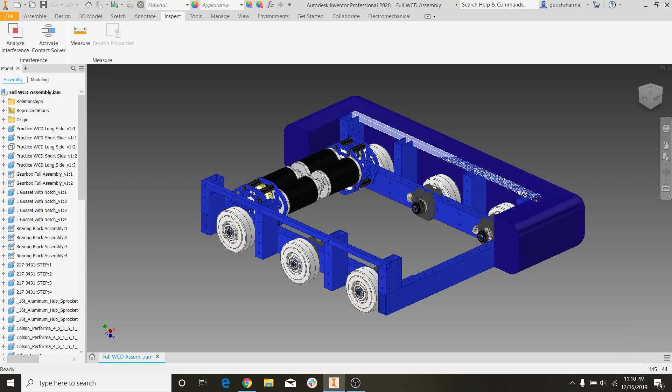Today we're going to be making the belly pan on our drivetrain. If you don't know what that is, a belly pan is basically the big plate that goes on the underside of the drivetrain. It connects all the pieces of VersaFrame, like one giant gusset. The more important use is that you can use it to mount electronics to your base, and it usually has a crisscross pattern which makes it really easy to zip tie wires down.

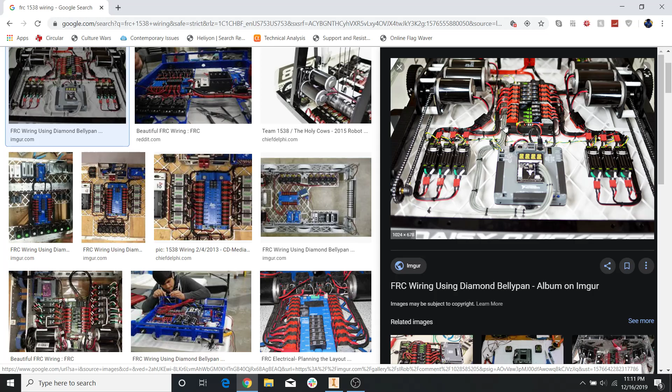Let's take a quick example of that. This is their 2015 robot, a great example of how to make a really effective belly pan, or make use of a belly pan. You can clearly see all these wires are zip tied down to the crosses on the belly pan, making for really clean wiring in general.

Let's go look at another team, of course 254, great team. Just another example of how you can use a belly pan. Over here we have a more simplistic belly pan, no crosses - I don't know what the technical term is, fence pattern maybe, whatever you want to call it. There's no pocketing on this belly pan, but the wiring is still pretty clean - I think they did that by drilling holes into the belly pan and running the zip ties through there.

So that's the general purpose behind the belly pan. Other teams do electronics on the side, which is something we did last year - it made it really easy to access, but we're going to focus on the belly pan that goes on the drivetrain. Teams sometimes like to do this really compact electronics thing. I don't know how I feel about this, because it seems really hard to access the motor controllers when you're trying to test the motors on your robot. That's just a personal preference.

But let's go ahead and go back to this CAD. To start off, I'm going to hide this bumper that we did from the last episode. Okay, and now let's start a new part.

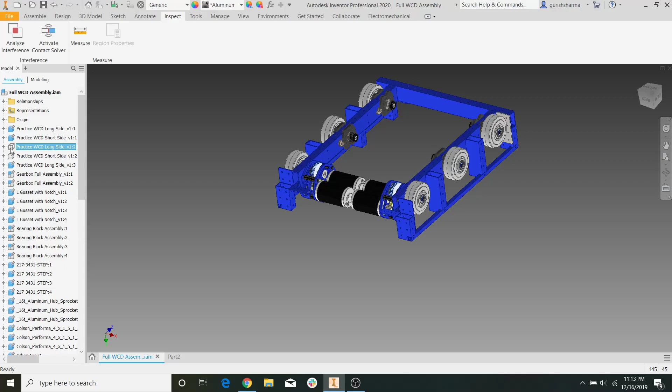The first thing we want to do is take a look at the dimensions of the bottom. Oh, looks like I hid this bottom piece - is it this one? Let me just undo real quick. Let's hide this one. Okay, let's create a new part.

Let's start a 2D sketch on the XY plane. We're going to start off by measuring the distance between faces to see how big our belly pan needs to be. I think it's going to be 24 by 16, most likely 24 by 16. Alright, that looks good, so let's start with a rectangle that's 24 by 16 - let's go 16 and then 24.

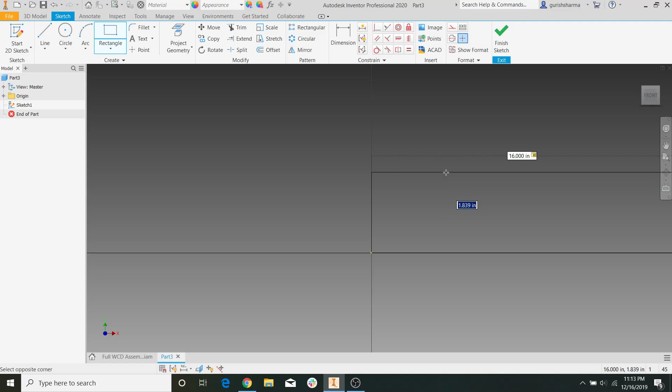In order to mount it to the frame of our drivetrain, we're going to make use of the holes that run around a VersaFrame like this. So let's start by offsetting by 1 inch, because that's how thick our VersaFrame is, and we can go ahead and pattern the holes around here. VersaFrame comes with 0.163 holes, but on our team we drill them out to 3/16, so that's what I'm going to do. 3/16 is not clearance, it's just the same diameter as a 10-32 bolt.

So let's offset this exactly how the VersaFrame is offset. If you don't know where I'm getting these numbers from, you can either measure it from here, or you can just go on VexPro's website and see the dimensions of VersaFrame. Anyways, we're just going to quickly pattern these across the drivetrain.

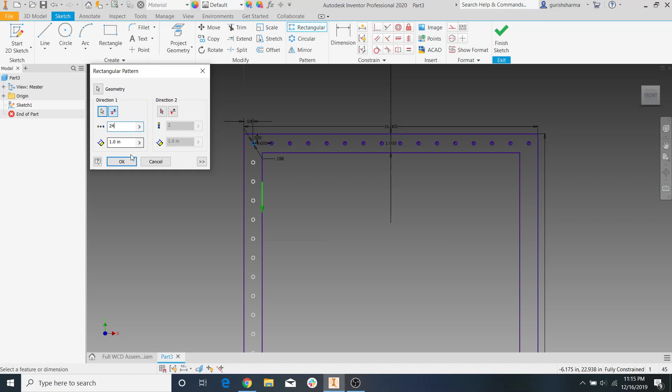So 16, and now let's do direction - flip the direction, make that 24. Okay, now just to do a quick recap, I'm going to use the mirror tool.

To use the mirror tool, you're going to start by making a line segment that's going to act as the line you reflect everything over. Make sure it's in construction, because this is not part of your final product.

Alright, let's mirror these holes. Oh yeah, it works - oh, I accidentally selected the line itself to be mirrored. If you make that mistake, just hold shift and then click the line again, I think. Alright, now mirror line will be the center one, if it wants to let me select it. Oh okay, looks like I already did select it.

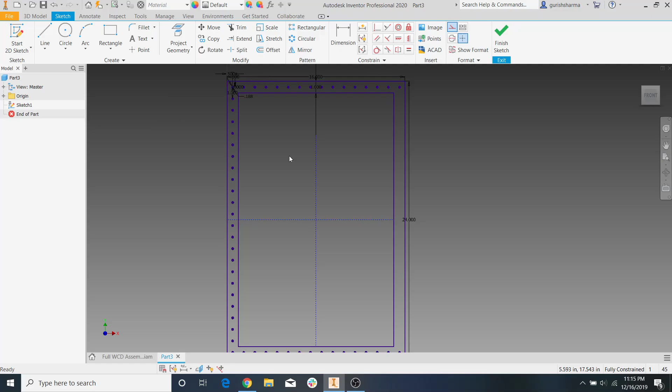Anyways, let's do the same thing on the other side. Let's start here, highlight all of this, mirror line, click this, apply, done.

Okay, now let's extrude this. Why the heck is that a hexagon? Why are these all hexagons? What did I do wrong here?

Okay, I guess it just looked like they were hexagons. I don't know what really happened right there. But okay, I guess they're still circles.

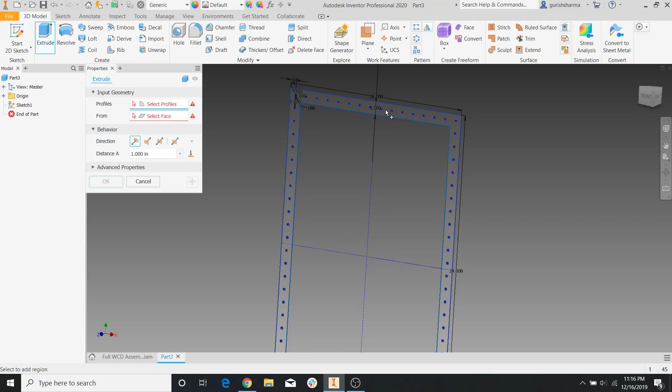So let's extrude this. Some teams used to use 16th-inch metal, some teams use 1/8 inch. I think the general rule is that if you do 16th-inch metal, you're going to have really thick cross braces, and I don't want to do that. So I'm just going to do 1/8 inch thick metal, which will also be good in terms of holding together the frame. I think 1/8 inch was a pretty good thickness to make sure everything stays together.

Now the next thing we want to do is create the actual cross braces, right? So let's start another 2D sketch. And the first thing we're going to do is project geometry.

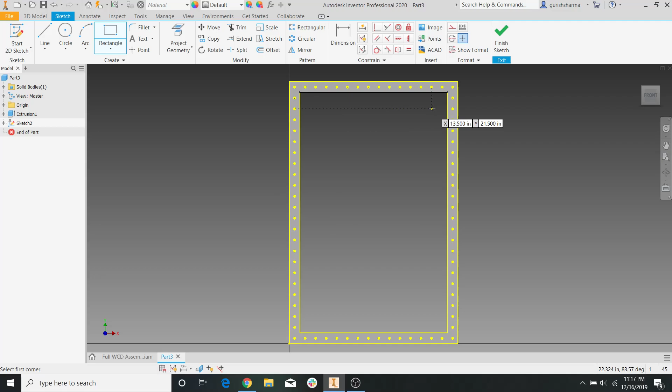Okay, so we basically need to decide how many cross braces do we want to go across and how many cross braces do we want to go down. I honestly am just going to do, let's see, we can probably do like 8 across this way and 10 down. I think that sounds good.

So I do want to know the dimensions of the inside. It's just 22 and 14. But just to show you guys what that looks like, I'll set them up here.

Now we're going to start by making a template of one cross brace in the corner. And that's going to start by making a construction box. We basically are going to take the length of the inside and then divide it by the number of cross braces we want. So let's do 14 divided by 8 because we want 8 cross braces along the inside.

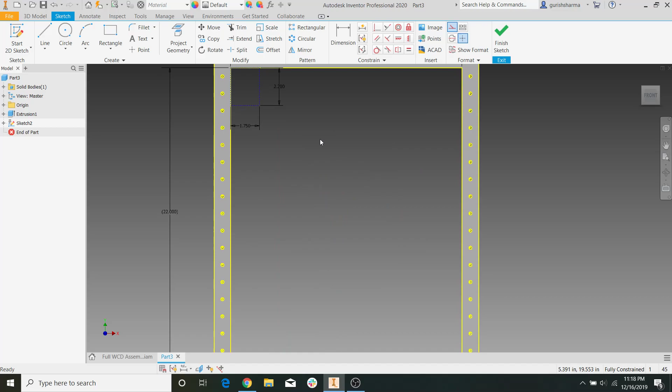And then for the other one, we'll just do 22 divided by 10. Okay, I actually think we can go... no, those look like pretty nice numbers. I was going to go a bit bigger, but you guys can mess with it however you want. I think I like this.

So the next thing we're going to do is create the actual crosses, and that's by staying in construction. We're going to go from corner to corner, right, really simple. And the last step is really just doing the same thing we did in the other episode with pocketing and doing this 3-point center style design.

And then let's do 0.2. Oops, it looks like I'm still in construction, so I'll just undo that, get rid of construction, and do that one more time. Okay, and let's do it in the other one.

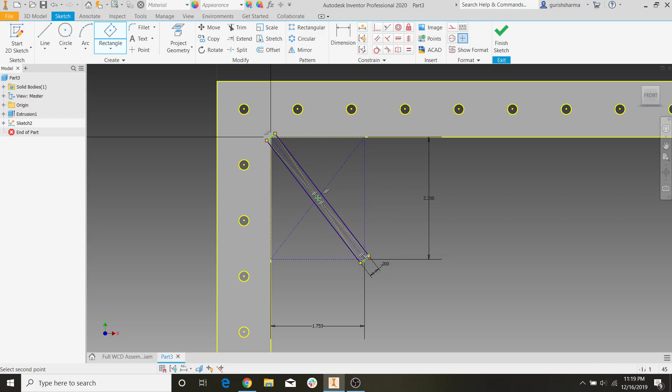So I don't have to pattern this inside here. I'm going to finish the sketch and then pattern it externally, just because it makes more sense. If you pattern this in here and then try to extrude it, you're going to have to click each individual cross brace. But if you extrude one and then pattern the extrusion, it saves a lot of time. So let's do this one.

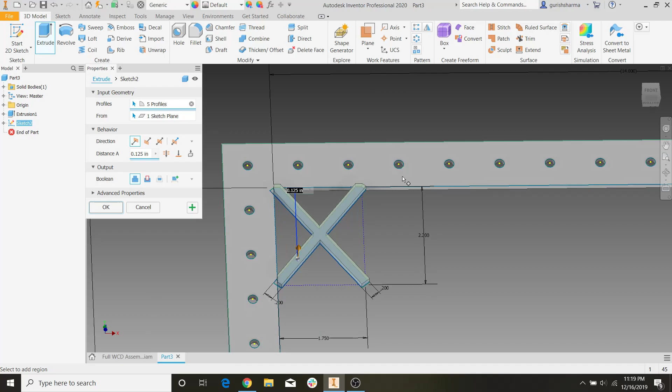Okay, now you can see it's going above the belly pan that we've already made, right? I want to teach you guys another tool here. So what we're going to do is tell Inventor that instead of going 1/8 of an inch, we're going to go to a certain distance. If you hover over this, it says To, right? We're going to say we want to go to the bottom face of the belly pan.

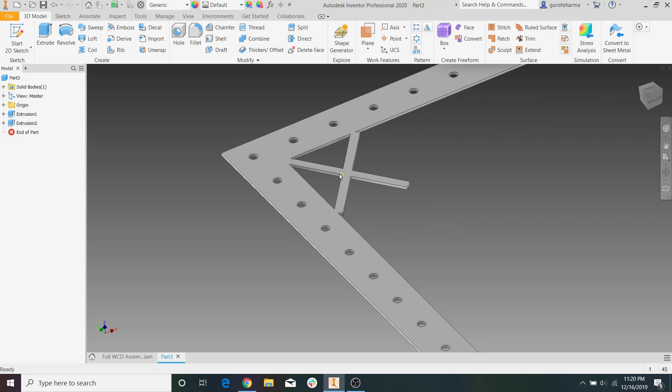And now let me show you why this is important. Let's say okay, so that means if we edit this extrusion here and say I just want to change it to 1/16 of an inch, that second extrusion will automatically update, right? And that just makes stuff really easy. Okay, now as you can see, there's a gap here.

In this corner here, and this corner here. But I'm pretty sure it should be filled after we pattern it. I think it should work out. If not, we can just go back into Sketch and edit it. It's been a while since I've done this.

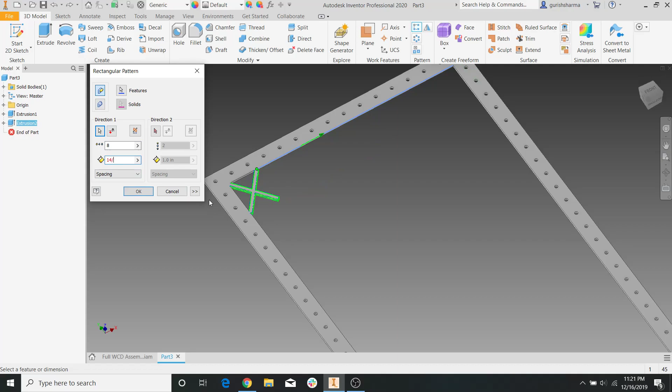So the feature we want to rectangular pattern is going to be the X, of course. The direction we're going to choose is across. Now the first thing it's asking is the number of times we want to do it. Earlier we said we want to do 8. And the second one is asking the distance, which is going to be 14 divided by 8. Right? And you can see it just fits perfect.

And direction 2 is going to be this edge, going not that way. So let's flip that. We want 10. And then I believe it was 22 divided by 10. Okay. Now you can see that all of the crosses overlap, and it should make for a clean belly pan.

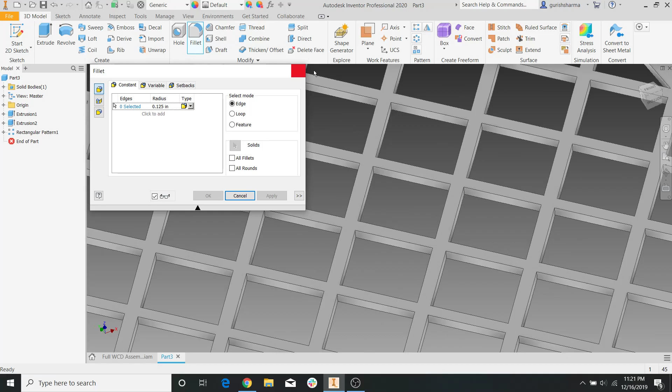Okay, now let's do the little more time consuming, or CPU or GPU, I don't know how computers work, whatever, computer intensive process. We're going to be filleting every single inside curve, because as you might remember from the pocketing video, a CNC router cannot cut perfect edges. Maybe if you have a water jet, but a CNC router definitely cannot.

So just to illustrate that real quick, let's do a sketch on here. The bit we use on our CNC is a 3/16 bit. So if I have a 3/16 bit that's this big, you can clearly see how it won't be able to get into this corner, right? The most it can do is its radius, so from here to here, which would be 3/32. So that's the size fillet we can create.

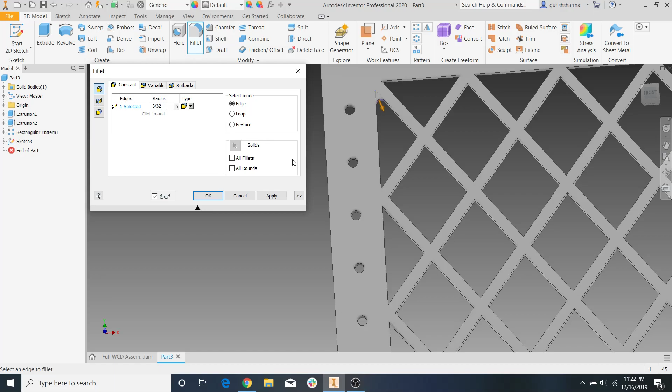So all I'm going to do is hit this inside edge, right? That's 1/8 inch. But I want to do the absolute minimum, which is going to be 3/32. So not much difference, but it's still better than 1/8. Now, this is where it gets kind of crazy. We're just going to hit all fillets, and then hopefully Inventor doesn't die and it actually executes all the fillets. So we'll see what happens.

Alright. Oh wow, look at that. It looks like it did all of them pretty fast. Much faster than I expected, to be honest. And then let's hit apply. Okay, I think applying is the part that takes a bit longer. And of course you might notice that I missed the fillets in the corners. I'm going to get to those in a second.

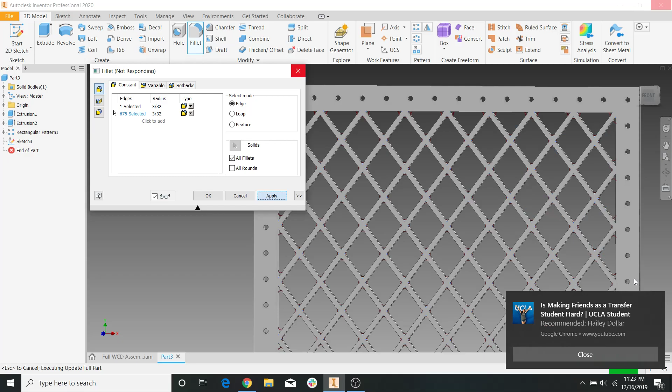So while this loads, let's talk about the next step. Next step I want to do is not only mount this belly pan to the drivetrain, we need to start cutting holes for things that already mount to the drivetrain, such as the bearing blocks and the gearboxes. So the gearboxes, once I switch over to the other tab, you will be able to clearly see that they stick through the belly pan, as well as the West Coast Drive bearing blocks. Alright.

It looks like all those fillets worked out. And now I want to go ahead and hit the fillets in the corner. I actually think I might make these an 1/8 inch fillet just so it looks nice. Yeah, let's go ahead and make this 1/8.

Okay. And now, before we move on, I'm going to quickly save this just to make sure we don't lose anything. Let's just save that. Actually, you know what? I'll just save this belly pan. V1. Alright.

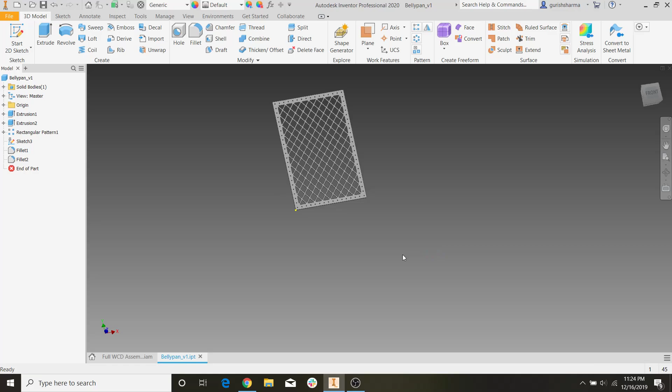And now we're going to import this into the assembly, and you'll be able to clearly see how a lot of it just won't work in its current state, and that's going to be the next step, editing it to make everything fit. Go ahead, right click, rotate, escape, let's start constraining. The first thing I'm going to do is constrain to these holes. So obviously this is one of the corner holes.

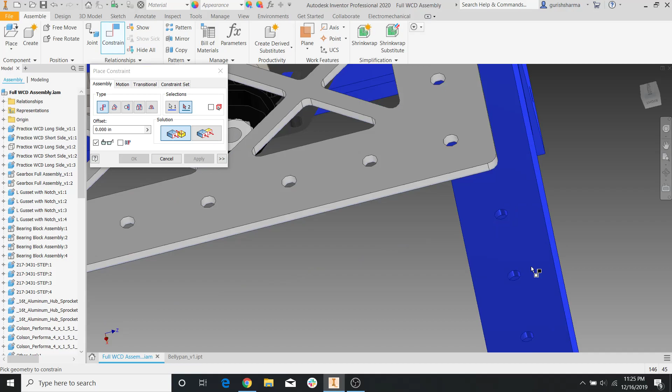And then I can pick any other set of holes. I think I'm just going to pick the next closest one, because it's very easy. And then we can just do a face-to-face constraint. I'll lift that up. A mate constraint will go from this face to this face. Okay, cool.

Now, the next thing I want to address is this problem. So, as you can see, the bearing blocks are going inside the belly pan, which is obviously a very big problem. The second problem is that the gearbox is going through the belly pan, which is obviously another big problem. So those are the next two things we need to address. The first thing we're going to do is the bearing blocks.

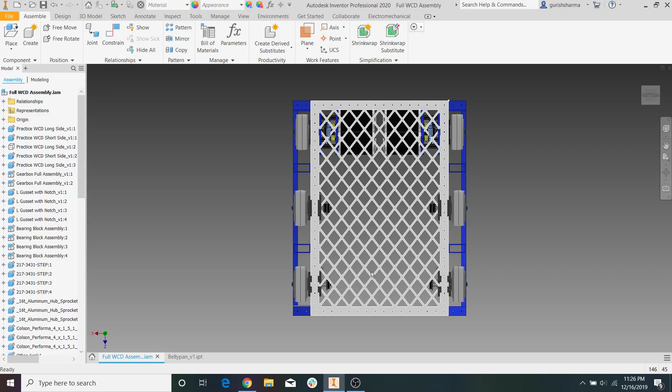Now, I'm going to be completely honest. The method I use to cut all the holes that go into the belly pan is pretty much guess and check, because I don't know. I mean, I could measure how far away this is from here, but to be completely honest, I found it to be a lot faster to just guess.

So let's just get a rough estimate, I guess. 3.5 inches. Okay, so I need to know that the rectangle that I cut out, the center of it needs to be 3.5 inches from the bottom edge. So I guess that kind of helps. So let's start a sketch.

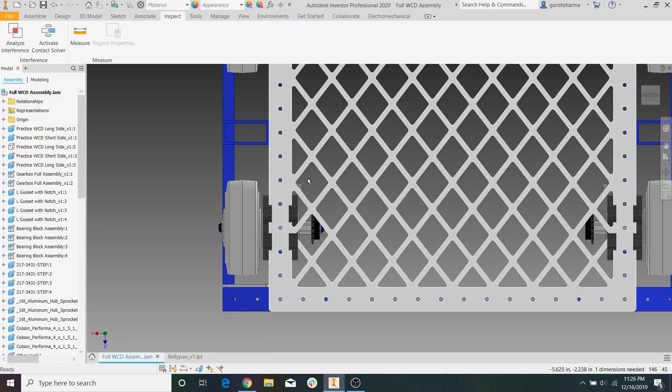The first thing I'm going to do is cut out my shape, and it's going to go 3.5 inches. Oh, that's not what I want. So the width is just going to be 1 inch for now, and then I can make the height of it like 2 inches. I don't know. Let's measure that real quick. So as you can see, it's not a very cut and dry method. I'm just kind of guessing and checking to see how this works. Okay, let's do 2.5, I guess.

2.5 inches. Let's draw a center line from here to here. Construction, because we don't really care about it. And then we can center it 3.5 inches away from here. Alright, so I'm just going to do one for now just to test it and see what it looks like. Again, let's use the Extrude tool. So Extrude, and I want it to cut to the other face, right?

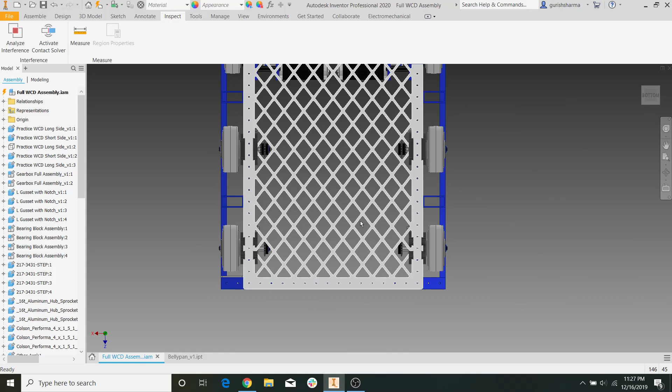Okay. Let's take a look at what happened. Let's see, what side did it cut? It looks like it cut the wrong side, actually. So let's go ahead and flip that. We're just going to open up our extrusion. Let's turn it around. All we have to do is delete this 3.5 and then make the 3.5 away from this face, right? Okay, now let's try again. Let's save that real quick and take a look at what we have.

Okay, as you can see, I clearly messed up the distance. I didn't select the center point of the line, I selected the bottom face. So yeah, that was the problem. I selected the bottom edge. So let's delete that and go from the center line, 3.5. Finish sketch.

Okay, now it looks like the only thing that's particularly an issue is going to be this cross brace area here and this cross brace area here. So all we really have to do is extend this rectangle out more, which is actually good because that will also allow us to create a more rigid frame, and I'll show you why in just a second. So instead of 1 inch, let's go 1.5 inches. Okay, nice, that extended right into the frame. Finish that. Go back here, and it looks a lot more safe, right?

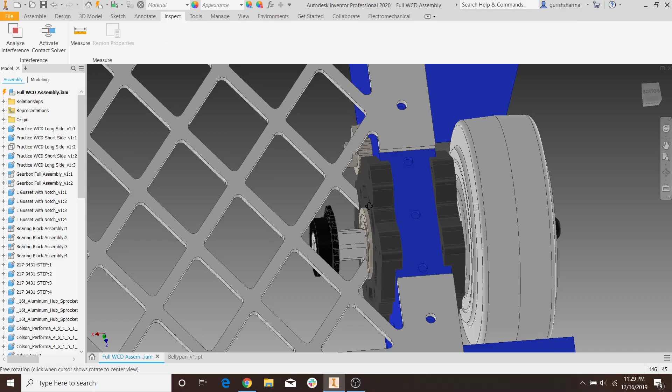I don't like that it's cutting into here like that. There's absolutely no reason to. So I'm just going to go back and edit this so it doesn't cut into that corner. Okay, so instead of saying it should be 1.5, what I can instead do is project geometry of this line, hit escape, and use the coincident constraint to say that I want this point, that white point, to be fixed to this line, and hit escape.

Sorry, throat's a bit dry.

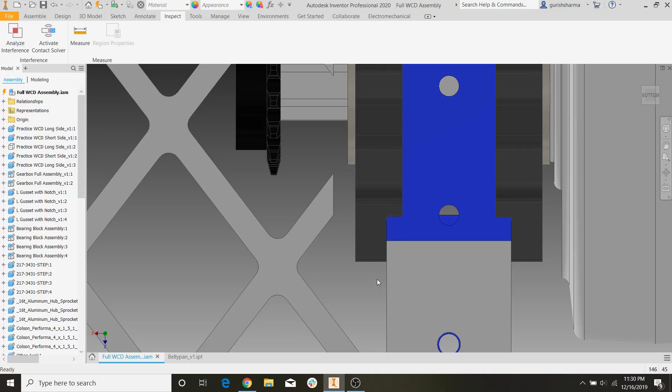Okay, that looks a lot better. I'm going to get to making the actual sturdy frame around it in just a second, but as you can see this also allows for a good amount of space. Remember, the point of a bearing block is to slide. It allows some space for it to go back and forth, right? And that's one of the main reasons we have the bearing block in the first place. And the number we selected should allow for enough movement. Okay, that looks pretty good.

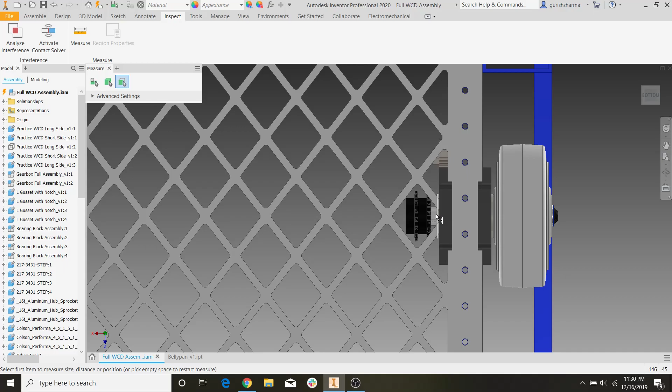The next thing I'm going to do is basically do the middle wheel, right? And then we're just going to mirror that over to the other side to these wheels. So let's do that again. Let's just measure how far away it is from the bottom face. Let's see, let's pick a rough center point. Right there. And let's do, what are we doing? The bottom edge? Yeah. Okay, so 12 inches, right? Well, it says 12.05, but it's like 12 inches. So let's do that again.

Go back to our sketch. We're just creating the same thing again, right? So let's just stick with 1 inch for now, and then we can edit it later. We're going to do, what, 2.4-ish inches? I'll keep 2.5 inches for now, and then that should be good. We're going to create a center line real quick in between, slide this over real quick, in between these two lines so we can actually dimension it away from the edge.

Hello, can you please let me select it? Would appreciate it, thanks.

Okay, this is interesting. I don't know why it's doing this. 1.209. Okay, that's wrong. That's completely wrong. Okay, I'm gonna have to do this manually. I thought I could use like the quick select tools or like the little green dot that automatically locks in stuff, but I guess it doesn't want to do that.

Let's see, 2.5. Yeah, there you go. Okay, now we can slide the whole thing. How many inches was it? 12 inches, I think. Yeah, 12 inches. Let's do 12 inches. Okay. And then to select the actual profile, we just double click on extrusion.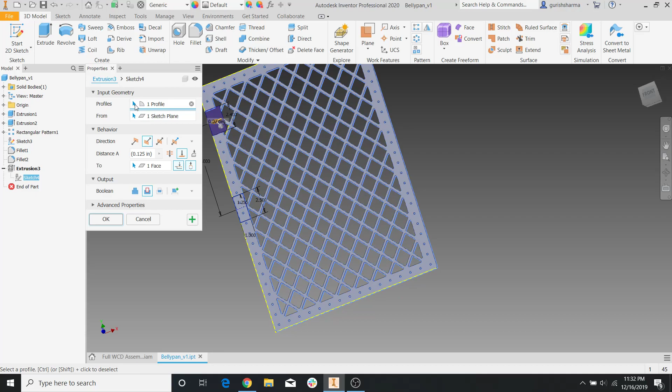Okay, and then we go back to profile. Come on. Come on. Let me select profile. Oh, sorry. I guess I already selected it. Okay, that looks pretty cool. Let's make sure it lines up, and then we can move on to like widening it. Okay, cool. It lines up. Now let's just move it out similar to what we did in the other one.

So I'm going to delete this width that we have here, and then project geometry of this inside curve, and then I'm just going to make that coincident constraint. Oh, not that.

Sorry, I keep having to drink water.

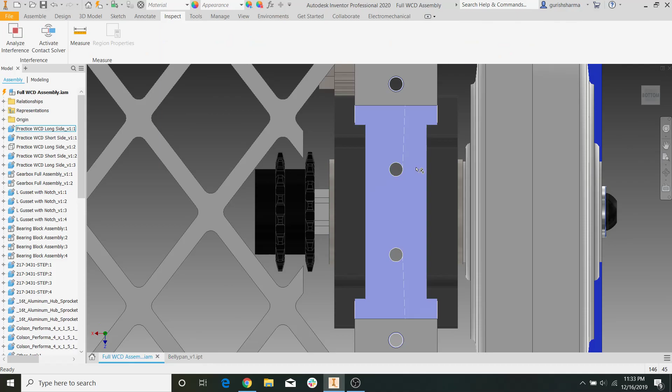But yeah, that should be good enough. And then if this looks good, which it does, what we're gonna do is extend or like mirror this to the other side, right? And once it's mirrored to the other side, we can go ahead and create a frame around this so it doesn't look like it's just cut off randomly.

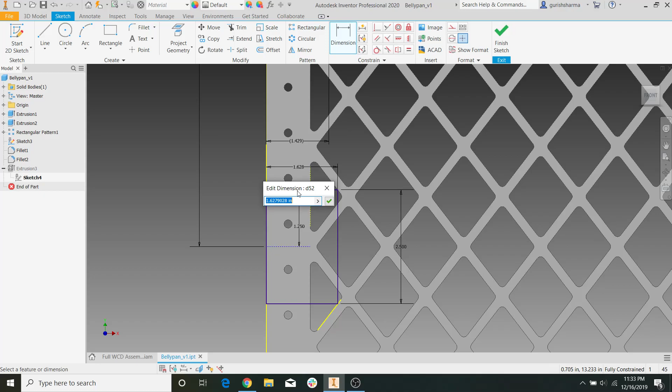One thing I find actually kind of interesting is that it looks like this is, yeah, it's definitely longer, which is interesting. So this one is about 1.429 inches. And you know what, instead of doing coincident constraint, we're actually going to delete that and then just make it the same dimension, because we don't need to make it coincident constraint. Yeah, this will work just fine. And it'll be a lot more symmetrical, right? Yeah, that looks a lot better.

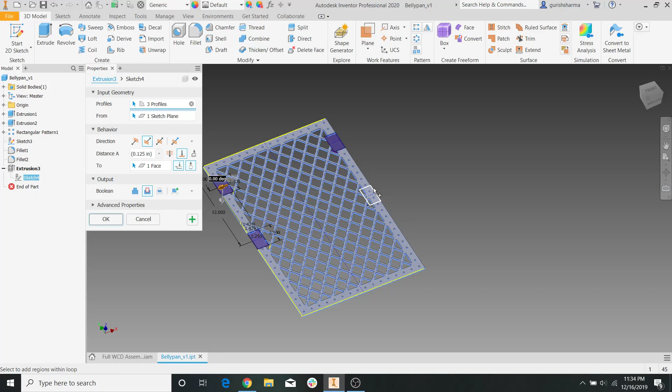So now let's go back to our sketch and then just mirror this whole thing to the other side. And you guys obviously know how to do that, so I'm just going to go through that real quick. Hit escape, mirror. Let's go ahead and mirror all of this. And then we just have to actually select those profiles. So profiles, select, hit OK, and then let's check on these. Yep, they look good. Go back to our assembly, make sure they look good. Okay, everything seems to be in order.

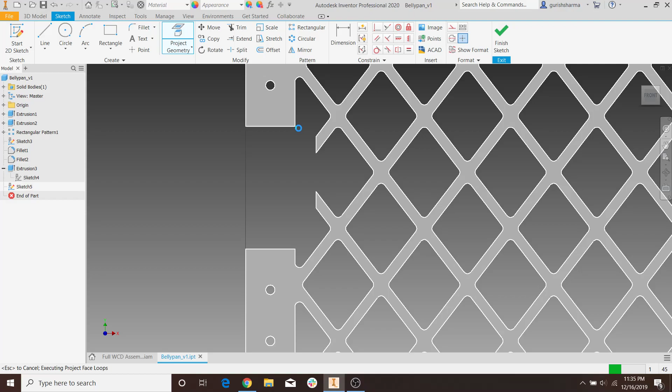Now, the slightly harder part is going to be actually creating the frame that goes around this. I'm going to show you how to do it for just one of these real quick. So all we're trying to do is create support for this whole structure here, right? So first I'm going to hit project geometry, and I'm going to project the whole thing, so I can actually edit it. Wow, that's taking a lot longer than expected. Now, I don't know how to explain this process, so I'm just going to show you. I feel like a lot of this is guess and check, but I don't know, maybe I'm just bad.

So I'm just creating rectangles to go around this, but I'm only defining the width of the rectangles. So that's a little problemo. Let's delete that coincident constraint just so I can extend this. I know that these two have to be in line with each other, right? So let's just go ahead and connect them with the construction line. And then just say that all of these lines are parallel to each other. There's probably a faster way to do this now that I think about it. Come on. Oh, my bad. I meant to say vertical line. Yeah, there we go. And now these are all moving together.

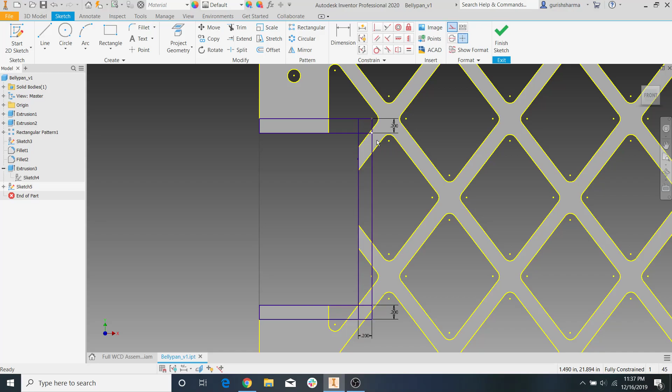Okay, now all we have to do is add a final rectangular piece that is also going to be 0.2 inches wide. Yep. And then let's take the construction out on that. Come on. Alright. And now what we're going to do is set it up so this line is going to be on the border of this. Okay, so if you can sort of imagine this, if I extrude this, I've now created a more rigid frame to go around this whole thing.

And the reason this process is kind of random is that you're going to get a lot of corners like here, or small gaps like this that you just have to remove manually. You can't fillet them out or something. You just have to manually cut them out. So what I'm going to do is connect this with the line here from here to here.

Oh, I'm still in construction, so let's get rid of that. Connect these two with the line. And now I should be able to just trim these off. Or not. Okay, what I'm going to do is delete the dimensions. And now I should be able to trim these off. Okay, that looks pretty good.

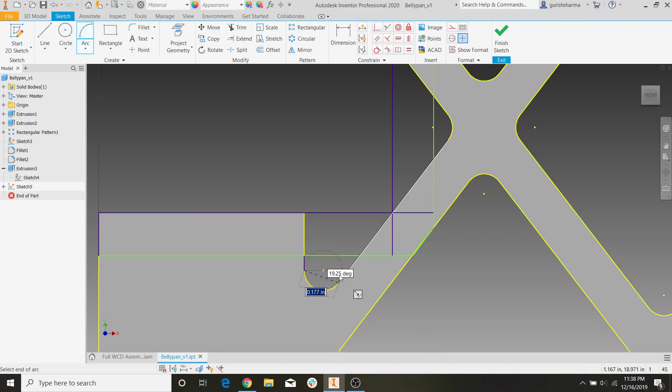So stuff like this, all you really have to do is go over the parts you want to keep. So I'm just going to go over this whole segment here. Let's do an arc real quick. Where does it go to? Oh my god, Inventor is being very laggy. Okay, now let's do a line from here to here.

And so the reason I'm doing this is because I don't want this to be a hole. I want this whole region to be filled in. And then we can take care of the rest of it just by making this construction. So since this line is construction, it obviously won't be able to extrude the rest of it, if that makes any sense. And so let's just repeat the process for the other holes.

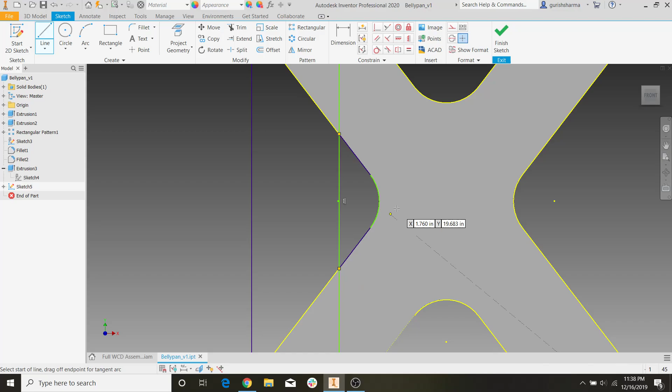And then I'm just going to do this for one of the bearing block pieces because I feel like this is pretty self-explanatory, and I'm just going to be wasting a lot of the video if I do this for every single piece. Okay, and then let's hit them with the line here. And then we can make this construction just so it doesn't accidentally extrude this whole diamond plate, right? It just does this area.

And then over here, to be honest, I think we can keep the sharp edge, and once this is filleted down into a curve, it should look okay. We'll just guess and see. So it's going to ask me to select some profiles. Right now it's trying to select all of these little diamonds, which is why it's taking so long. But all I really want is this rectangular frame right here, which I'm going to give it a second to load. Okay. So we can do this, obviously.

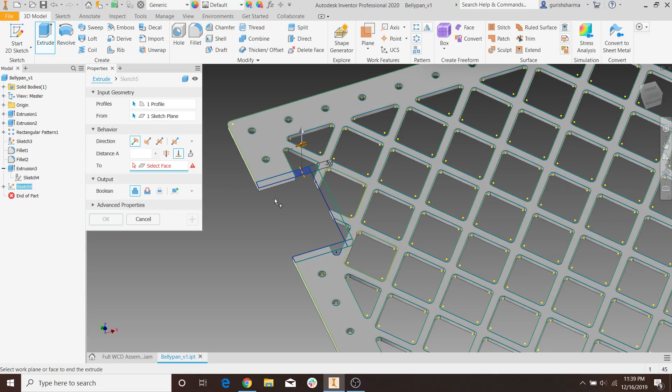Oh, before I move on, I'm going to do a quick To, so it doesn't try to extrude it in an inch. Go back to profile. Let's do this rectangle. Let's do this rectangle. This little triangle. So you can see I'm just picking all the little things that I went over earlier. See, that automatically got filled in. Since I cut this off here, it doesn't override into there. So I also want this taken out actually.

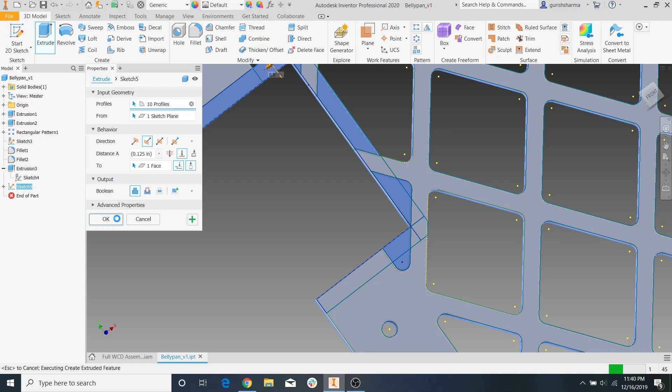And then I'm just gonna hit OK. Hopefully, crossing my fingers, this works. Let's see. So I'm gonna go back before I move on with the fillets and make sure it looks okay. Yeah, that actually looks really good. It doesn't look like the bearing block can slide too much in its current state, but we can obviously adjust that very easily, which I'm not going to waste time doing right now.

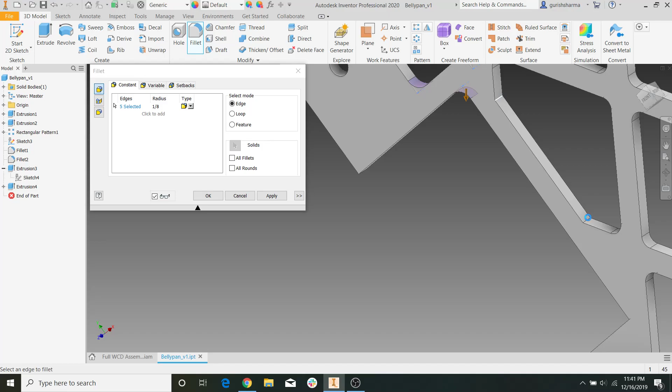But let's go ahead and hit it with some fillets. And once we give it some fillets, what we can actually do is mirror what we have done here onto the other side. I'll show you how to do that in just a second. So right now it's doing 1/8 inch fillets. I'm going to change it to 3/32. Okay, it looks like I got everything, and now I'm just going to change to 3/32, and it should be good to go.

You know what, that actually looks a lot better than I expected. So if we go back and take a look at it, damn, that looks pretty good. So let's go ahead and save this. And now, I won't repeat the process for this middle section, but I'll show you how to mirror what you've done here onto the other side.

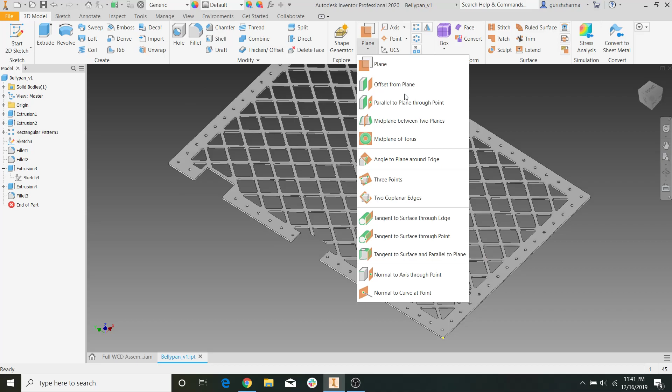So what we want to do is essentially mirror a whole 3D feature, which requires a mid-plane. So we're going to go to the drop down and create a mid-plane between two planes. And a plane includes a face, right? So we're just going to click the face here and the face on the other side.

Now it's created a plane perfectly in the middle, and that's going to allow us to mirror the features. So let's go, where's mirror? Mirror. The features we want to mirror is the last extrusion we did and the fillet, right? And then the mirror plane is just going to be this work plane. And then we go ahead and hit OK. Crossing my fingers, it all works okay. I guess it did okay.

I'm not sure why the fillets didn't go over, to be honest. Let's look at what it did. I don't know. It didn't do the fillets for some reason. I have no idea why. Say okay. If it didn't do the fillets, that's okay. We can just do it manually. I mean, it's not a big deal. I'm pretty sure it's something trivial that I missed. If you can correct me, please do.

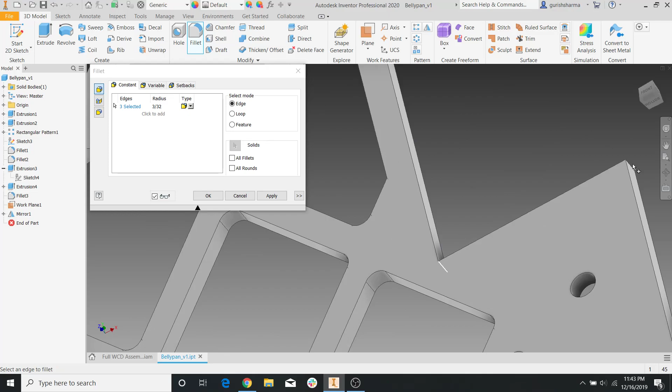That looks good. And then we're just going to get this fillet in here, and then here. I think that should be the last one. Hit apply. Alright, there we go. So now both sides look the same. Oh, looks like I missed a fillet here. If you miss a fillet, all you have to do is double click on the fillet over here, and then you can just click on the fillet that you missed. Click OK.

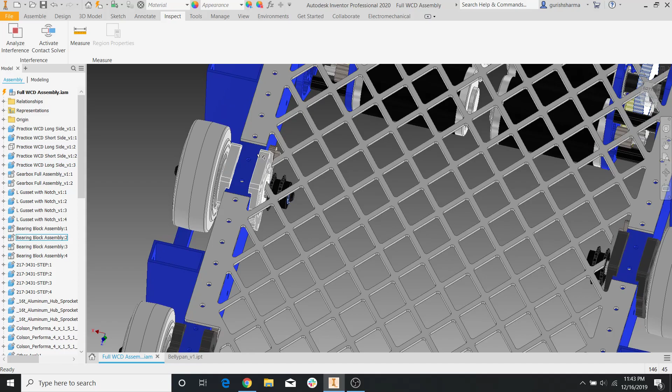Cool. So let's go ahead and save that. Go back to our assembly. Okay, that looks really, really good. You guys can take care of this middle one. It's the exact same process, right? Just slightly different shape. It's really arbitrary. You can see that I just picked whatever looked good. I took out what I didn't want, and I just threw in shapes that I thought would make it look better. It's really random, to be honest, this whole Bellypan process.

So there's two things left. We need to cut out a hole for a gearbox, and then I also want to show you guys how to actually create holes for electronics to mount to, because here, just looking at a quick example, actually that's not very helpful. Let's take a look here. Yeah, so you can see that there are actually holes in the Bellypan in order to mount the electronics, as you can see on like the PDP here, right? And so that's what I want to show you guys.

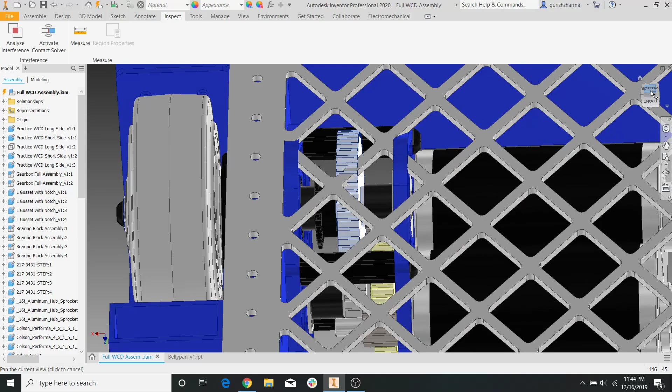So going back to Inventor, let's just create a slot for this gearbox. It's the same exact process as before, with the hole cutout and the rectangular border that we created around it. It's just for the gearbox. So since it's the gearbox, I can either create a rectangle cutout that's like here, right? Sorry if my mouse is making all the parts flash, but basically here, or what I actually like to do is start from the corner and pull out a rectangular box till the end of the gearbox, and that just makes it a lot easier to install the gearbox. It makes it a lot easier to slide in, if that makes any sense. But let's go ahead and do that.

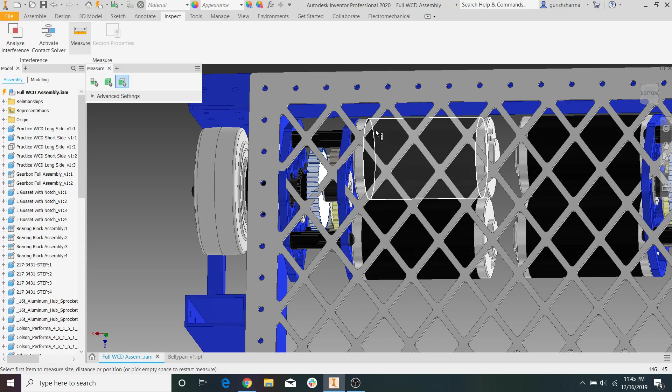We're going to start by doing a 2D sketch on the Bellypan. We don't need to project geometry of the whole thing, just the edges we need to manipulate. So let's do this edge, the top edge, and this edge, right? And so that auto aligns the rectangle up to these two edges, and now I want a rectangle in some dimension, right? So again, this is all very guess and check. The one thing we can measure, I guess, is the plate. So let's do that. I'm going to go to the inside of the VersaFrame. So 2.17 inches. I don't want to do 2.25 just because it's a bit too close and it makes it really hard to install. So let's do 2.5 inches.

Okay, as you can see, this rectangle is a free floater. It doesn't really want to lock onto anything. So before we move on, let's just use the coincident constraint and lock that center point of these lines to the whole line of the rectangle we're working on. Okay. There we go. Next thing we need to choose is the height. Again, this is very, very arbitrary. I would just like to pick a nice whole number. So let's choose the bottom edge here. And let's shoot for, I don't know, like right there-ish, I guess.

5.44, let's try, we can go under the 5 inches I guess. Just for aesthetic purposes, actually, you know what, I'm going to show you guys how to use the driven dimension tool.

So what you're going to do is create a dimension and just click check. Now hit escape to clear this. Right click and say driven dimension. Now this dimension is driven by anything you do, so if I move this around, this number will automatically update.

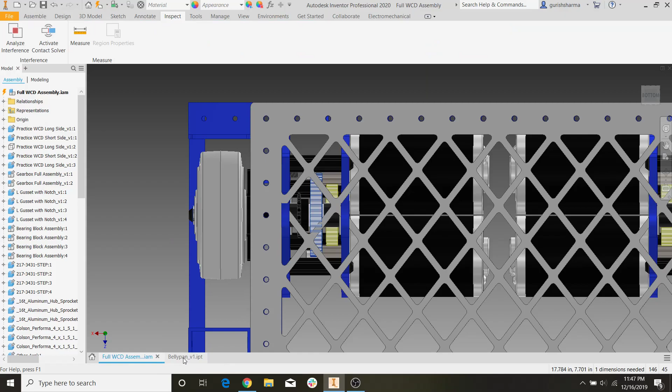So the number we had earlier, what was it, like 5.4? I know I'm in this general range, but just to make it look a lot better, what I can actually do is tell it to cut off halfway here. Yeah, I think this will actually make for a really good look.

Since there's no significant difference between here and this point here, I could make it tangent, possibly. No, I think I'll leave it the way it is. Again, this is just all random, arbitrary, it's just aesthetics. It really does not matter what you do.

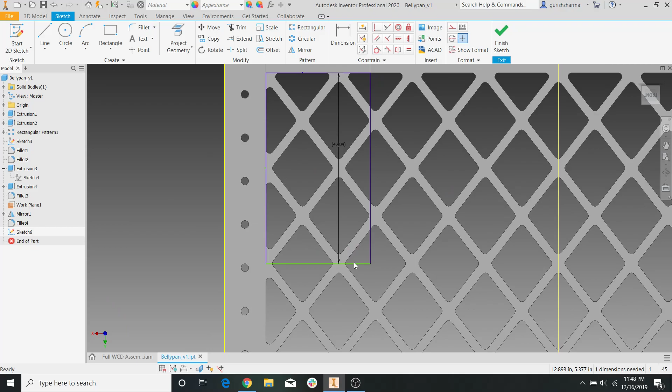So as you can see, I hit 5.5. I want to decrease it. I think that's a bit overkill. Let's do right here. What, 4 point, what is that? 4.4? I don't know, forget the number. Let's just do it exactly halfway.

We're going to do project geometry on that curve, and now hit escape and use the coincident constraint to make that point on that line. Okay, cool. Now we can extrude this, right?

Okay, and if you go back to our West Coast assembly, you can see that the gearbox clears it really well, or the cutout clears the gearbox really well. I don't know, something like that, right?

And now we're just going to repeat the process for creating the rectangular frame around here. So let's start another 2D sketch on here. Quickly project geometry of the whole thing. I mean, we could project geometry of individual parts, but honestly it's just a lot, and I might as well just project geometry of the whole thing.

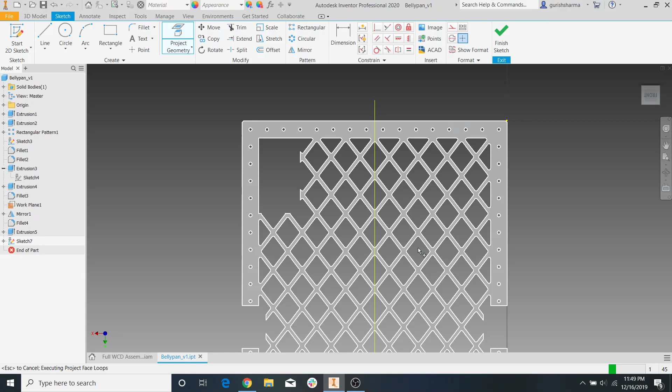Okay, so let's create a rectangle that's going to run from here down to here-ish. This line right here, right? And then I want it 0.2 inches wide. I don't know how long I want it yet, I just know I want it 0.2 inches wide.

Okay cool, now let's pull this back inside. Pull this back inside. And we can just use the coincident constraints to pull everything together. So let's do here to here, and then we can just do here and here.

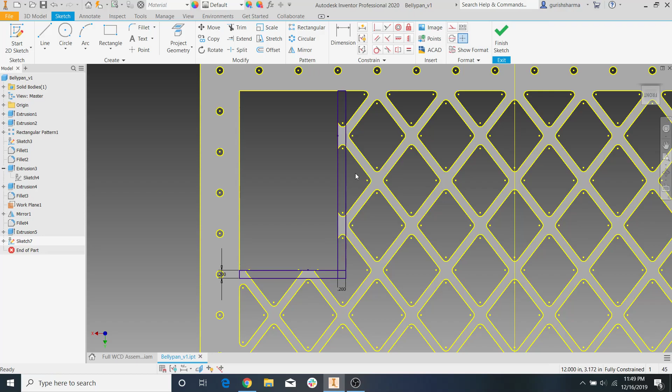And then the next thing we're going to do is go through, and remember all those little corners and stuff that were sticking out on this end? Just go through and make sure there's none of that. If there is, you can edit it real quick. And it looks like I'm actually pretty in the clear, it doesn't look like there's anything sticking out. So let's go ahead and extrude this.

Okay, give it time to load. God, I need to figure out how to make this run faster. But all I want to do is select these shapes, right? Right now it's going to an eighth of an inch, so I'm just going to change this to the To feature. I'm going to go to the bottom face of this.

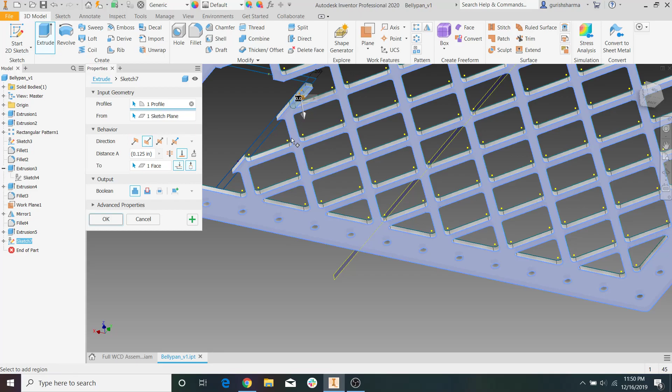Go back to profile. What am I selecting? I'm selecting this whole rectangle here, this whole rectangle here, that's it. And then hit okay. Right, and then the next thing I'm going to do is hit it with a few fillets, and we should be able to move on to the next step.

Alright, let's hit it here. I'm just going to manually go ahead and select all of these.

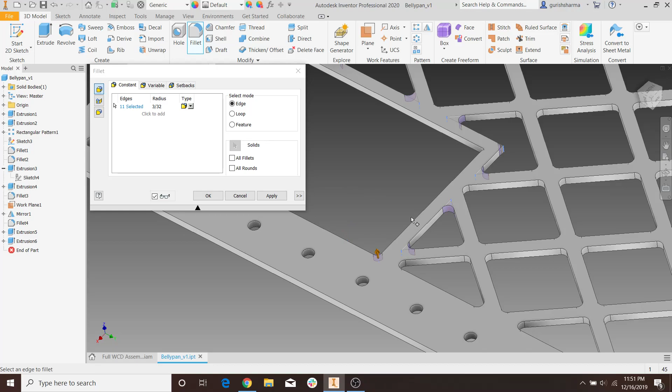If you guys have a water jet, you probably don't need to do this, but I think it just aesthetically makes it a lot more appealing. That's redundant, it makes it a lot more aesthetic, right? I don't know, that's just me though. If you got wire EDM or some cool water jet, I guess you don't have to worry about this.

Apply, there you go, save this boy. And then before I mirror it to the other side, I'm just going to go ahead and check to make sure everything looks good. Yeah, it actually looks really good. This is flush up against the bumper, sorry, not the bumper, the belly pan. And it clears everything pretty well.

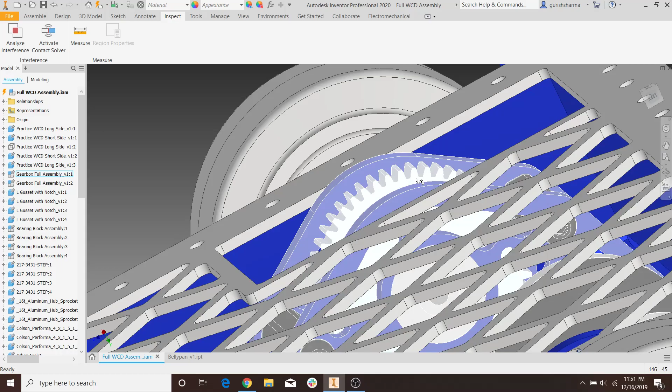You could pull in this side, you could pull in this side if you want, but does it really matter? Like, would you have mounted something in this corner? Probably not, right? So you might as well just save some weight and cut out some more metal here. Honestly, it does not make that big of a difference.

Let's mirror these features. What am I mirroring? I'm mirroring this extrusion and this fillet, and then I'm just mirroring it to the other side.

Hopefully this time the fillets actually mirror and I don't have to go through it again. If they don't mirror, I'm not going through it again - you guys can do the fillets yourselves. It's not that bad, I don't have to show you how to do it in this video. Yeah, it didn't do all the fillets. I don't know why, okay whatever. You guys know how to do that.

We're moving on. Let's save this real quick.

The next thing we're going to do is mounting electronics. I'm just going to show you one electronic piece, and from there you should be able to take care of the rest. The one I'm going to show you guys is the power distribution panel, which is this middle piece right here. So let's go ahead.

We can either go to GrabCAD, or I think AndyMark has it. But I think AndyMark sells the PDP - I think it might also be VEX. Let's try VEX, I hate AndyMark, so if VEX has it I don't have to worry about it. AndyMark makes it so hard to find CAD on their website, you have to go through their whole catalog or something. I don't even know. Oh okay, thank God, VEX has it, so we don't have to deal with AndyMark.

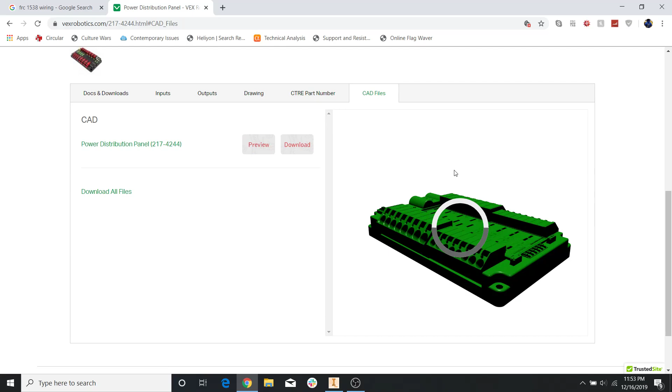Thank God. Just go ahead to the CAD file, power distribution panel, preview. Okay, that looks good.

I don't really need the CAD to actually make the holes I'm about to make to mount the power distribution panel, but I'm going to download it just for the sake of showing you guys what it looks like mounted to the robot.

So going back here, let's go ahead and start a 2D sketch on here. Generally what you do is model all of your electronics to figure out their layout. So that means I would basically take a rectangle here, right?

How big is the PDP? The PDP is 7.586 - let's do 7.6 by 4.52, let's do 4.55. So 7.6 by 4.55. Let's do 4.55, and then we can do 7.6 right here. Oh wow, it was actually pretty close.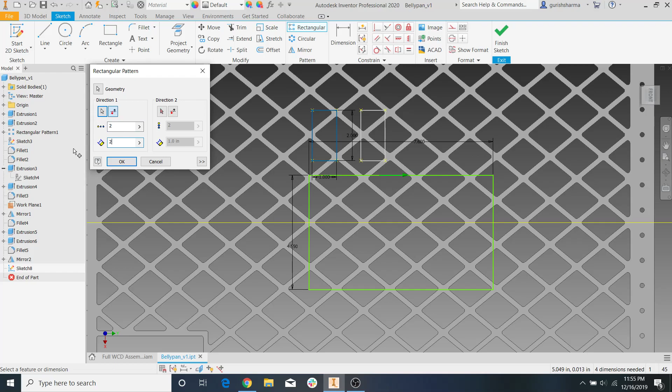Okay, so this would be representing our PDP, and then maybe we have some talons laying around here. If you guys don't know what talons are, just look them up - I'm not going to go over electronics in this video, that's for another time, I probably won't even go over it on this channel. But let's say we got some talons laying around here, I'm probably going to rectangular pattern them like this, alongside here, something like that. I think you guys get the general idea of what I'm doing - I'm just laying out all the electronics I want on my robot. But just for the purposes of this video, I'm just going to show you how to do the PDP, and from there you should be able to figure out how to do everything else.

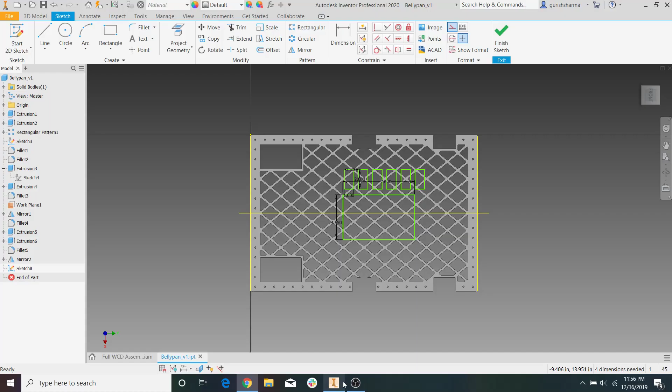So the first thing we're going to do is center the PDP along your whole belly pan, right? So let's project geometry of these two sides, and that's going to allow us to create a construction line that runs from one side to the other. And then we can just center everything on this line. Hit escape. Give Inventor a second to load, and then we're just going to align all of these little pieces.

Okay, now it just wants to slide up and down. So after laying out my supposed pieces, maybe I decide that I want my PDP to be 6.5 inches away from the edge, just some arbitrary number. It doesn't really matter. But this border isn't part of my final product, it's only representing my PDP. What's going to be in the final product are the holes that mount the PDP. So that means we can make all of this construction. We don't really care about it. What we care about are the holes.

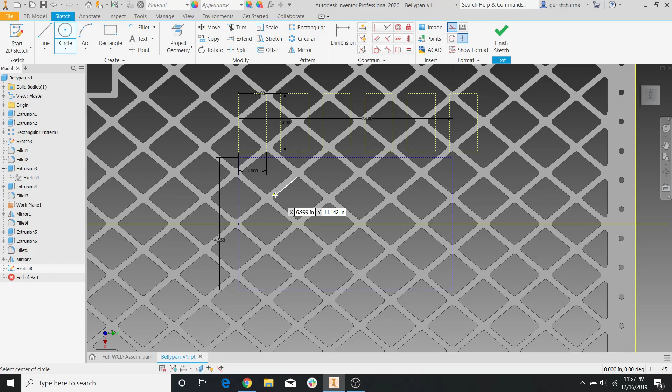So what we're going to do next is create this 4-hole pattern. We know it's a 3/16 hole, so let's start with that. And then it's in construction, let's get rid of that. Okay, let's go ahead and quickly make 4 holes. Not 2/16, 3/16. God, I'm getting rusty with my CAD skills.

But we got 4.11 for the distance between these two holes, and then 7.176. These numbers we obviously cannot round because they're the distance between the holes. So let's make this real quick. 4.11, and then let's do 4.11. And then what was it? 7.176? Okay. 7.176, yeah, like that. And then right now these holes are not completely aligned, so we can do that real quick.

Why are they at an angle? I didn't even know this was possible. So you saw, just to fix that, I just clicked the hole again, and then we just do 7.176.

Okay, and now these are not aligned. All we have to do to align them is just connect them with a line. That's in construction, because we don't care about it, it's not part of the final product. And then we connect it like this. And then we'll just tell Inventor I want these lines to be perfectly vertical. Yeah, vertical. Yeah. Or not, something is amiss here. Something is definitely not right. Do I need to make these ones horizontal? God, I messed something up.

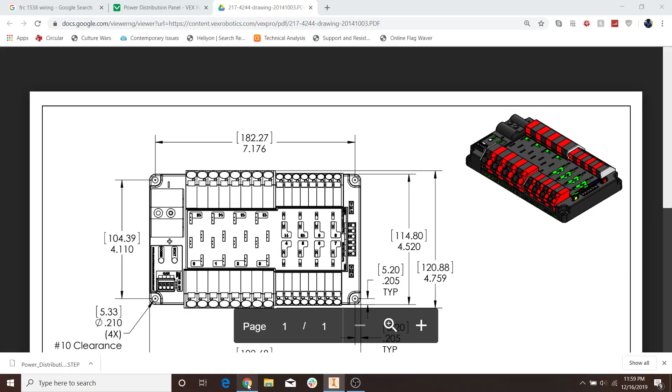So now, all we have to do is dimension them into the corner of this PDP, just like they show in the drawing. And so, instead of trying to dimension, subtract the number and trying to figure out what's going on, all we have to really do is center it, right? So we can find the center point on this line, which should be right there. Connect it to the center point here. God, I cannot even see my screen.

Somewhere along here is the center point, right? Okay, we'll figure out the center point in just a second. Let's put it on this line. The center point is just going to be half this width. What is the width? What did I do here? God, where are my numbers? 7.6, right? So I just have to say that tip of the line, escape real quick. The tip of the line is going to be 7.6 halfway, right? So 7.6 divided by 2.

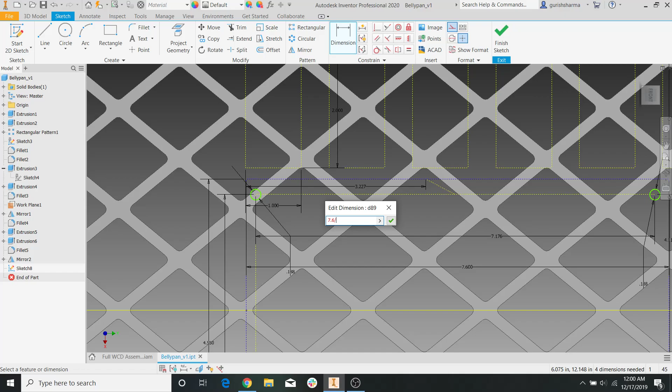Let's just do that. 7.6 divided by 2. God, I don't even know what I'm doing today. Okay, that seems to work, question mark. Not really sure why this line's diagonal, to be honest. Yeah, okay, so these holes are still moving, which is kind of interesting, to be honest. Not sure why. We'll just make this line horizontal, and that should center it. Yeah, it looks centered. And then we can just do the same thing on the other side.

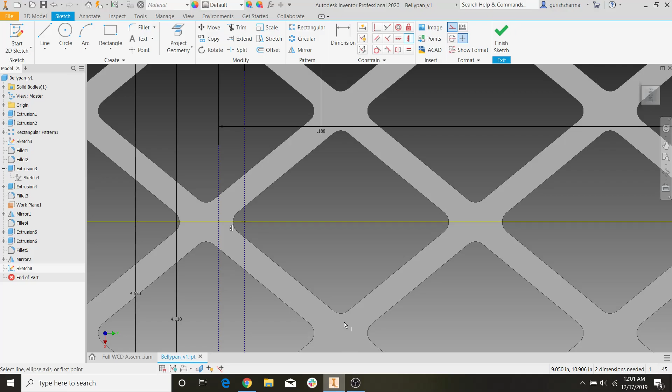Hopefully this time, it'll do it automatically, crossing my fingers. So we'll go from here to there, and tell Inventor to make that line vertical. Hit escape. Oh, I keep hitting the help button. There you go. So now we have our full 4 holes lined up the way we want, right?

The next step is obviously that these need to be cut extrude, but you might see that there's a problem with this. This hole cannot be cut extrude because it's already in the air. So what we're gonna do is we're gonna do a normal extrusion and then do the cut extrude later. You'll see what I'm saying in just a second.

So what we're gonna do is we're gonna offset this by, let's do 1/4 inch. Yep, that sounds good. Not construction. God, I need to pay attention to this more. Not construction. This is 0.25, this is 0.25 here.

0.25. God, I don't even know what I'm doing today. I think I'm just sleep deprived.

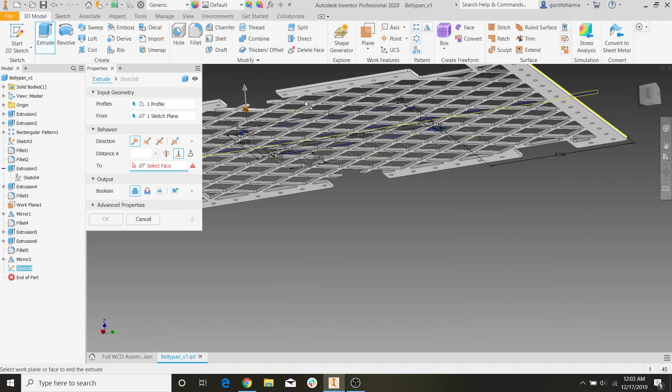But you can see that now that we've offset it, these things actually overlap on the frame that we made. So these holes will actually be usable. So let's do a quick extrude with these holes. And then we're obviously not going to go 1 inch. I'm going to start by doing the To thing and just going to go to that face.

Oh, not a cut extrude. So let's just change that back to a normal extrude, please. Click profile, because I want that thing. This thing. And then this circle. Okay. All we have to do is cut these holes back out and then fillet the corners, right?

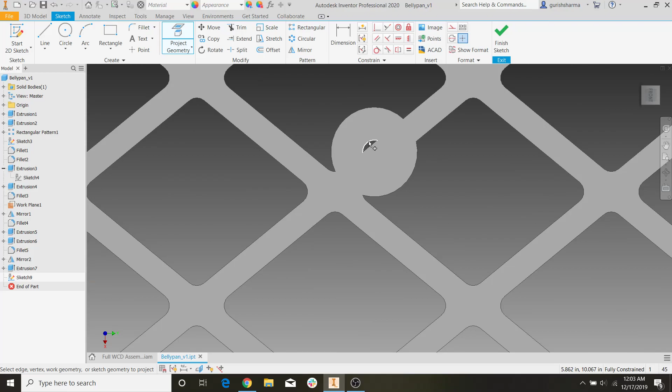So let's start by cutting the holes back out. These holes are okay, but these are obviously not. So we're just going to quickly project geometry of the curve, right? Make a circle from the center to the edge, and then circle from center to edge here. Hit escape, finish sketch, and now we can cut extrude this.

Okay, should be good. Now the next part is going to be filleting, which we've gone over many times, but I'm going to go over it just one more time. This edge right here. But yeah, that's going to be basically it for the rest of this video. Just filleting out all of these corners. But yeah, that's it for the belly pan.

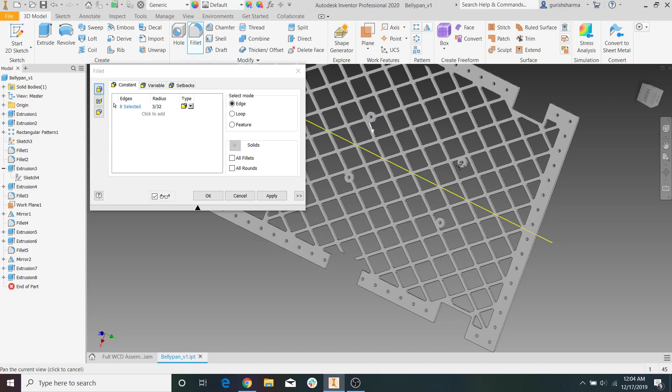You need to make holes to clear the bearing blocks in the gearbox, and then you also need to make these holes in order to mount electronics. And that's basically the premise of the whole belly pan, right? It holds your drivetrain together and it gives you various mounting points.

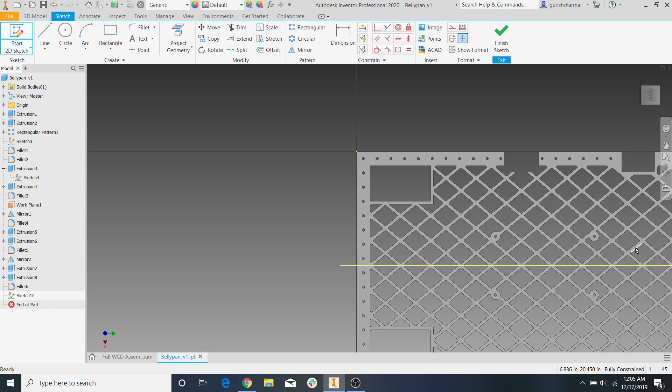Let's project geometry of the area of issue here and here. Now imagine you have a CNC bit that's 3/16, right? That CNC bit can only come in to where it's tangent to the edges you want to keep. So we can just do that like this. And now we want it to fill in this whole area, right?

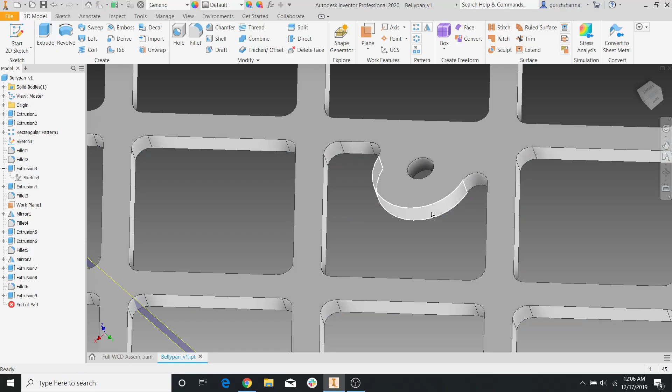So we can project geometry of the inside curves like this. And then we can trim this out here. And now we can fill in this whole gap. So let's go to the other side. We'll do it 2 again. Oh my god. And we'll just head over to this face, right? And then just hit OK. And see, that's a lot less effort than trying to fillet the same corner over and over again.

But everything else looks pretty good, to be honest. I think, yeah, this has another issue here. Let's just add on to this real quick. Shouldn't take too long. All you have to do is project geometry of the curves that are a problem, right? And then create your CNC bit, which is 3/16. Hit escape, and then make it tangent to the edges that it can actually go into. And then hit escape and trim off this leftover.

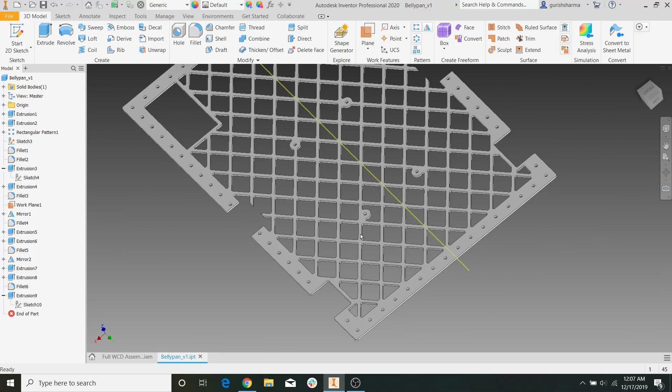So hit escape. Double click on the extrusion so we can adjust the profile. Click profile up here. That's going to be the next profile. Hit OK. There you go. Manual fillet. Beautiful. So those are going to be the mounting holes for the PDP, right? We can go ahead and save that.

That's going to be it for this video. As you can see, we've created clearance holes for the gearbox and bearing blocks, as well as mounting holes for the electronics. You guys can take care of the rest of it, I believe, like the frame that goes around this bearing block, as well as the mounting holes for the other electronics.